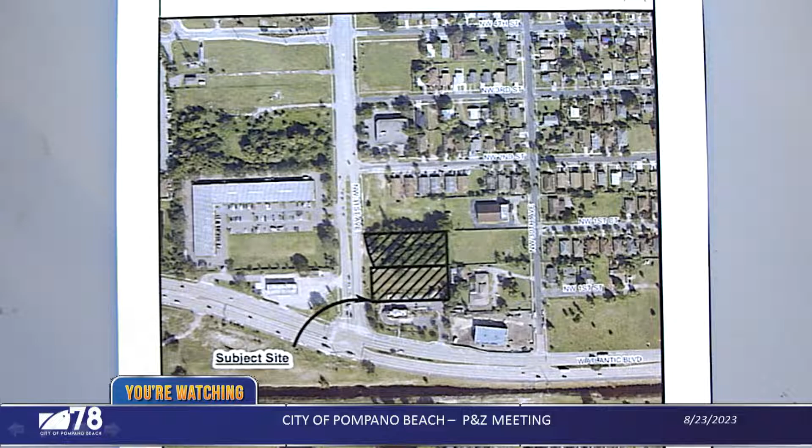All comments from the DRC meeting have been addressed. The plat reflects the All-County Development Review Report recommendations, and the review standards for a plat found in Article 5, Part 7 of the Code have been met. Therefore, staff recommends approval of this plat with two conditions that must be completed prior to placement on the City Commission agenda: first, the plat cover page must be signed and sealed by the surveyor and all owners; second, the applicant must submit a title opinion less than 6 months old addressed to the city. That concludes my comments for this evening.

The applicant is here to answer any questions if you have any. Does anybody have any questions of staff? Applicant, would you like to come up? Only because you're going to have to go on the record to say that your client will accept the two conditions, if you don't mind.

Yes, good evening, board members. My name is Elizabeth Surukdisian. Maggie had a hard time saying that last name. I'm here on behalf of Pulice Land Surveyors, representing the owner. For the record, I'm here only if there were questions for me. But Maggie did a wonderful presentation.

You're fine with the two conditions? Yeah, of staff? Yeah, that's standard. Mr. Chair, can we just get her address too for the record? Oh, okay, yes, I'm sorry.

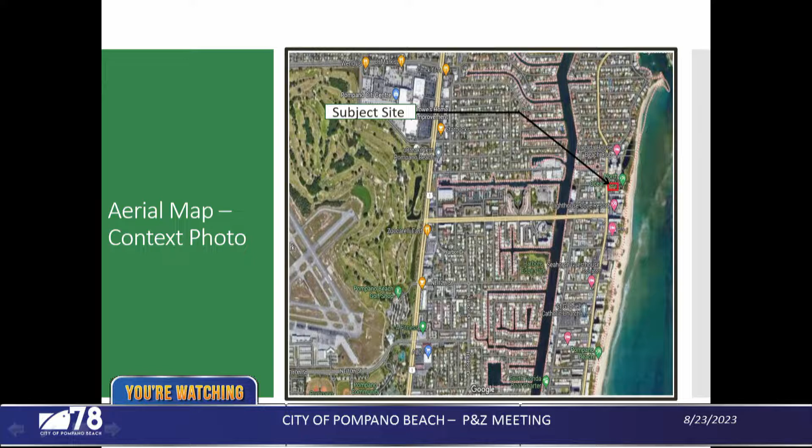This aerial photo shows the proposed building site in context with the area and the air park. For the purpose of this application, the height of the building is 242 feet above mean sea level, or 234 feet above ground level.

Excuse me, Diego, just make sure into the microphone for the record. Sorry. That's okay, thank you. Should I repeat it? No, you're good.

Go ahead. A review by the FAA has determined that the structure will not be a hazard to air navigation, and they included 3 conditions in the report.

Those conditions are included in the staff report. The application was reviewed by the city's air park consultant, Kimley Horn.

Our Kimley Horn representative, Mr. Tom O'Donnell, is here this evening if any technical question may arise. The application was also reviewed by the FDOT.

The application was reviewed against the air park structure permit review standards of the zoning code, and details of how the project complies with those standards are included in the staff report in the backup material.

The Development Services Department recommends approval of the air park obstruction subject to the following comments and conditions. First, construction must commence prior to the expiration date of August 16, 2024 of the FAA determination, or any subsequent extension that may be granted.

Second, if construction cranes are anticipated that exceed the maximum allowable height stated in the FAA determination letter, this temporary structure shall be submitted to the Federal Aviation Administration and a determination of no hazard received.

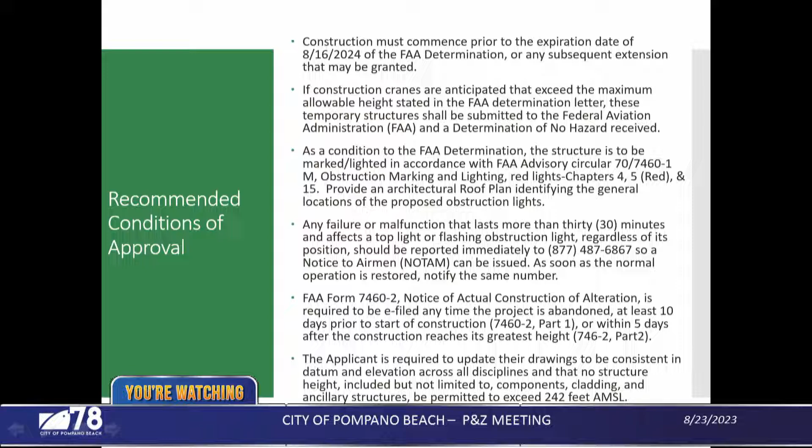AMSL, which is above mean sea level.

Okay, that's it, right? That's your report? Yes. Okay, anybody have any questions of staff and/or the consultant? Seeing none, is there an applicant?

Good evening, Mr. Chair, members of the Planning and Zoning Board. My name is Mike Vondermeulen. I'm with Keith. Our address is 301 East Atlantic Boulevard, and I have been sworn.

In reference to the conditions of staff, those are also the conditions of the FAA. We will comply with those. So there's no objection to any conditions. Here to answer any questions you may have.

Okay, anybody have any questions of the applicant? No, but, Mr. Chairman, is there a question going on with staff about some of the conditions here?

Okay, good evening. For the record, Tom O'Donnell with Kimley Horn & Associates. My place of business is 8201 Peters Road, Plantation, Florida, Suite 2200.

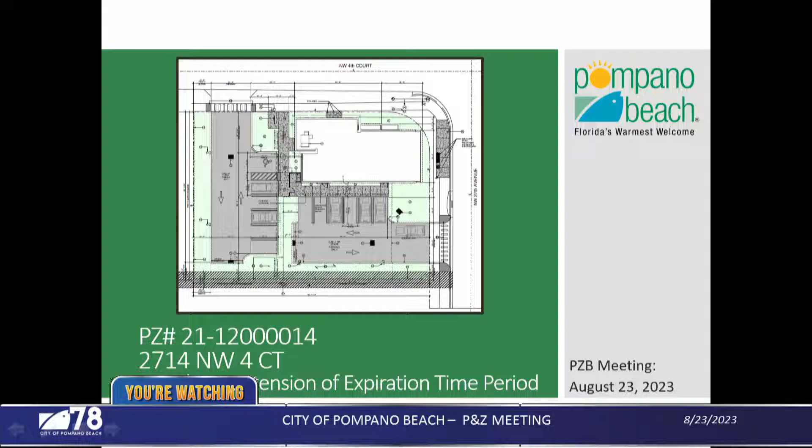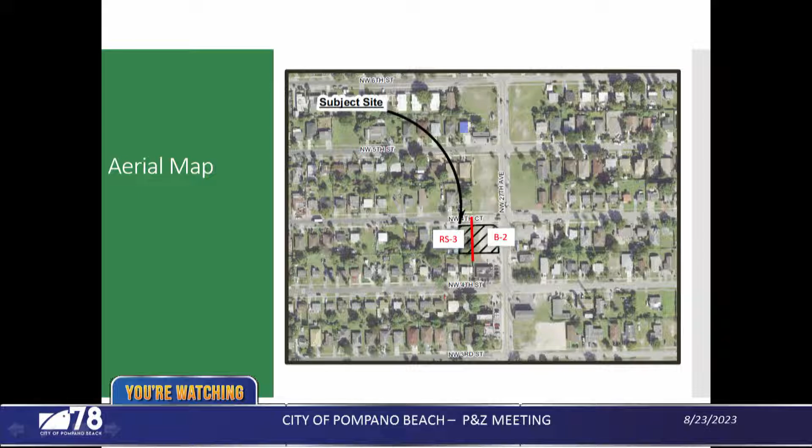My name is Lauren Gratzer with Development Services. This item is for the extension of the time period before which the development order expires for the site plan at the corner of Northwest 4th Court and Northwest 27th Avenue. The project is for the construction of a new BSO substation within the Northwest neighborhood, located north of Atlantic Boulevard, just between 31st Avenue and Powerline, within the Northwest 27th Avenue corridor. The property has a split zoning of B2, community business, and RS3, single-family residential.

So just a quick overview of the project, as this has not previously come before the board. It is a minor site plan and therefore was reviewed by the DRC and approved by the Development Services Director. Given the limited scope of work, the project did not require to come before this board. However, the authority to grant the extension of the development orders does fall on the Planning and Zoning Board.

The building that is proposed is going to be about 2,800 square feet and will be used for the police substation. The project was reviewed by the DRC in May and July of 2021. It was approved September 7th in 2021, and therefore expires September 7th of 2023.

This project also obtained zoning board approval for a special exception because of the RS3 zoning district designation for the use of the police substation. The zoning board of appeals approved the special exception in 2020, and that has since expired, so they will have to get a new special exception approval.

The applicant is requesting this extension because they were unable to obtain an approved building permit in a timely manner due to various delays with the design and bidding phases of the project. The applicant has made reasonable efforts submitting the work on the permit, and therefore they may be considered under one of the criteria for the extension of the site plan for the development order. Under the code section that allows this extension, making a reasonable effort towards the building permit application does fall under one of the criteria, which is letter A.

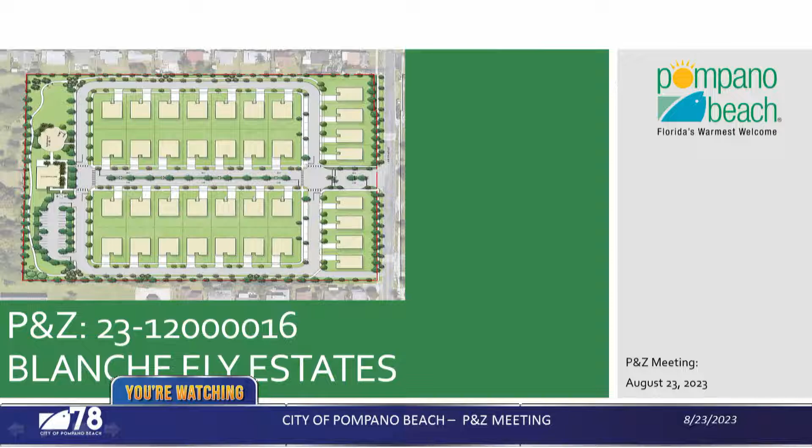This property is located at the 1600 block of Northwest 6th Avenue, located on the west side of Northwest 6th Avenue and north of Northwest 15th Street. Here is an aerial of the location of the property. It's located in the Blanche Ely plat on parcel A to the west, just abutting Sanders Park Elementary and on the west of Northwest 6th Avenue.

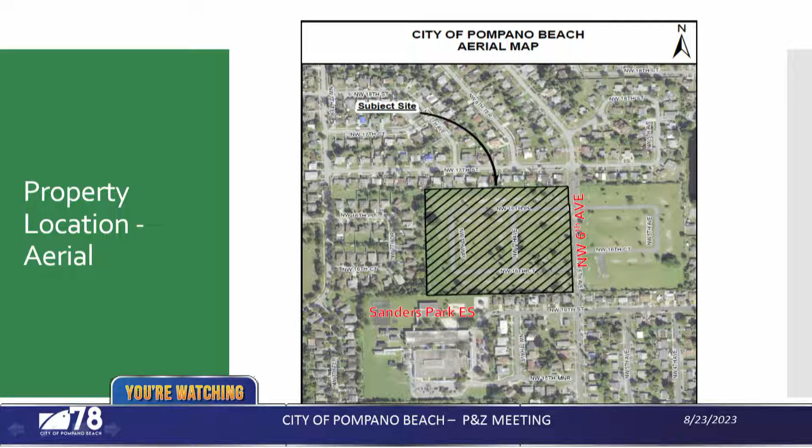The property is currently zoned RD1, two-family residence, with a future land use designation of low. The site is currently vacant. The applicant is proposing 36 single-family dwelling units on an 11.46 acre vacant parcel in the Liberty Park neighborhood. The total lot coverage is 35% per lot. The site plan was reviewed by DRC on July 5th, 2023 and August 16th, 2023. The AAC application is pending submission at this time.

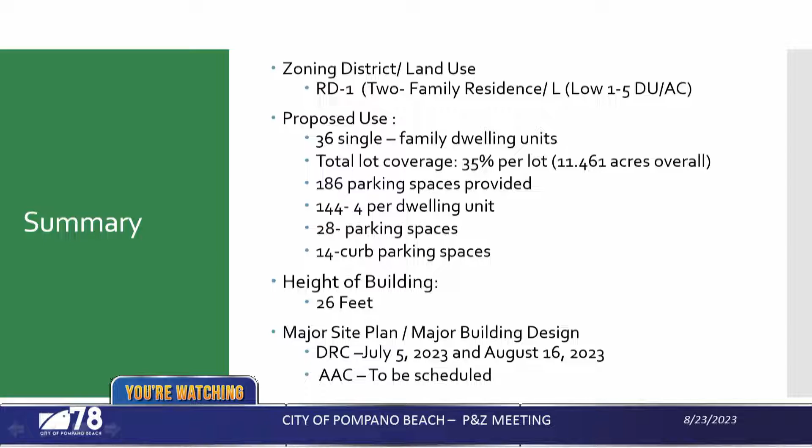The site will provide 186 parking spaces: 4 parking spaces per dwelling unit, 28 parking spaces for the clubhouse, and 14 curb parking spaces, which you will see on the upcoming site plan. Here is the existing conditions of the property.

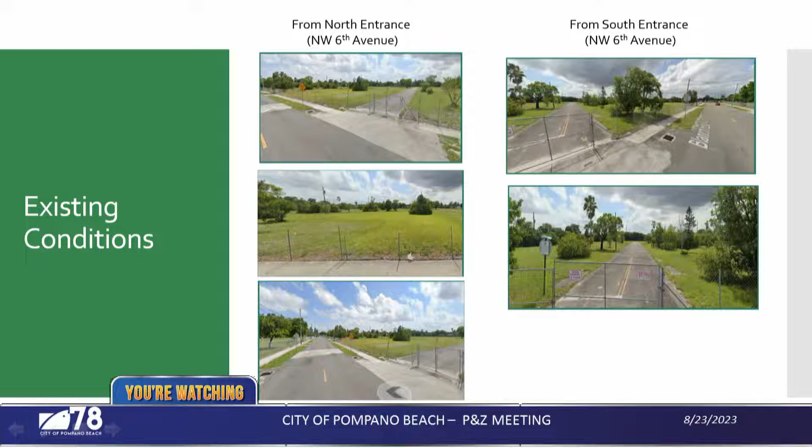You can see that it's vacant on both sides. To the north is RS4, residential single-family residence 4. To the south is RS4. To the west is RS4, and to the east is RS3, and it's consistent with the existing neighborhood. Here is a site plan of the proposed development.

Staff has 2 conditions. The second condition, as referenced on this PowerPoint, was not mentioned in the staff report. The following conditions are: on all elevation sheets, call out all architectural features to demonstrate compliance with variability and required number of design features for each model.

Repetitive look-alike multi-building development shall be prohibited. Multi-building development subject to these standards shall ensure that each structure is distinguished from the others through the use of 2 or more features found in 155.5601.c.4. The second condition is to provide HOA documents that clearly state that the trees on the property are protected, cannot be removed, and must be pruned and maintained in accordance with currently accepted ANSI A300 Part 1 industry standards and industry best management practices.

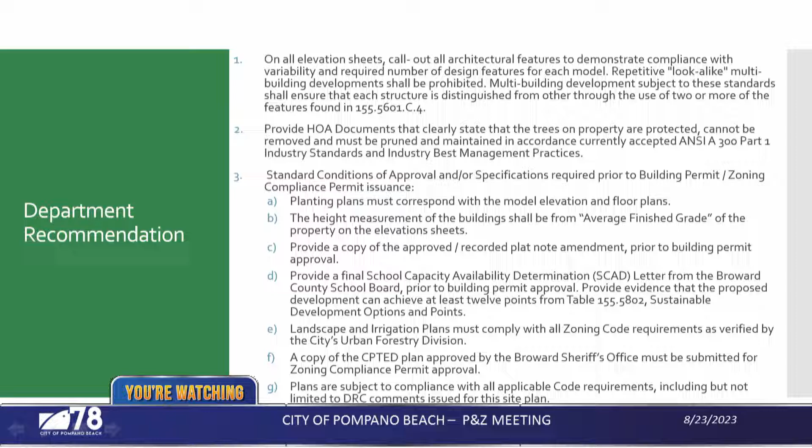This concludes my presentation. I'm available for further questions.

So just to understand, in our report the third condition was on it, but the second one was not. The first condition was there, but not the second condition, the one about providing the HOA documents. So in our staff report, there were actually 2 conditions, right? The second one, about the HOA, was not included in ours?

Let me clarify. If you look at your PowerPoint, you have 3 conditions, right? And condition 3 has a bunch of subparts to it, correct? Correct, yes. Does that one apply? Yes, it applies, I'm just not reading it into the record. So which one did you read into the record then? The second condition, no, the third - you read the second condition into the record. So this will be the third condition: provide HOA documents that clearly state...

The condition that has A through H, would you read that one? Because you didn't read that into the record. Okay, I can read it - those are standard conditions. You're not reading it because it's standard conditions, is that what you're saying? Yes, I'm sorry, I misunderstood. Not a problem. It applies, same as you're saying, it just wasn't called out.

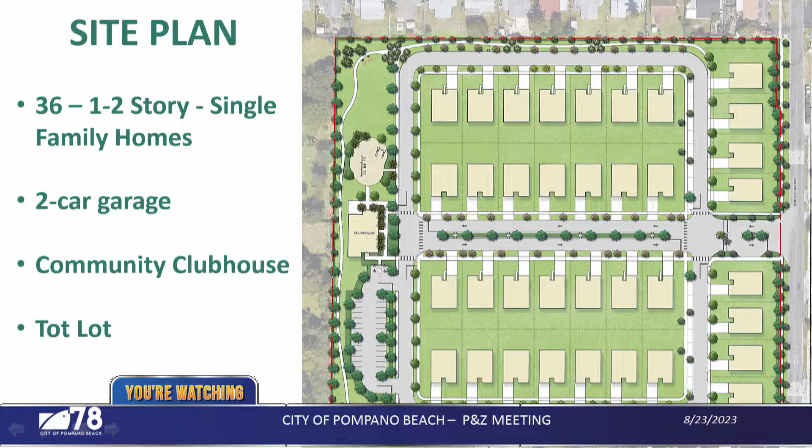All have two-car garages, all have a two-car driveway. There's plenty of parking at the clubhouse. We have a very large berm and landscape area along Blanche Ely Avenue. It's going to be a really, really nice project.

So I'll conclude there and just answer any questions you may have. Okay, and we have no problem with what is now 3 conditions of staff? Correct. Okay, thank you.

Anybody have any questions of the applicant? Yes, Mrs. Coleman, go ahead. I'm trying to figure out how this is going to work. Is there an HOA? There will be an HOA.

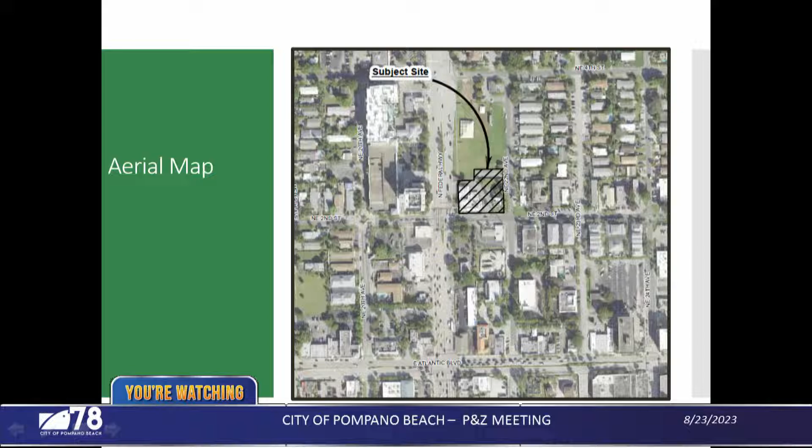This aerial photo or map shows the project site as we know it, where the old funeral home currently is. This photo isn't current—it doesn't show the Celeste project directly to the north that you approved just over a year ago, and it's currently well under construction. This is an old enough photograph that shows the vacant lot where those Christmas trees were sold for so many years.

The details of the project I will let the developer and his design team get into, but a brief summary is that the project proposes a 7-story mixed-use building with 95 units and ground floor commercial space facing Federal Highway, and the site is just under an acre. The project is utilizing 2 density bonus options available in the core sub-area of the ETOC.

First, the public art density bonus, plus the density bonus option where 100% of the required parking is within a parking structure. The total of those two bonus options would allow an additional 34 units, of which the applicant is adding 19 to the 76 units allowed by right, for a total of 95 units. The project was reviewed by the Development Review Committee for various revisions throughout 2023 and received building design approval in June from the Architectural Appearance Committee.

This site plan shows the extent of the building footprint and the relationship of the ground floor building liner with the rest of the site and context, as the project has 3 street frontages, with Federal Highway as a primary street, Northeast 2nd Street and 22nd Avenue as secondary streets in the ETOC. The ETOC establishes the hierarchy of streets within that district.

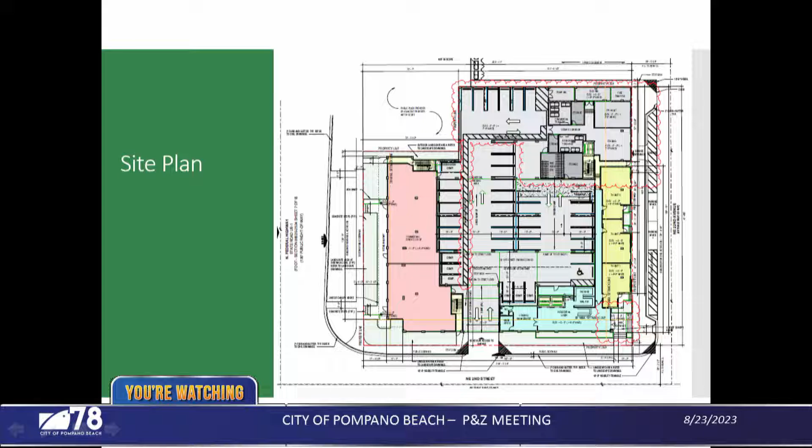Last, should the board find that the application has provided competent substantial evidence to satisfy the review standards for major site plan approval, the Development Services Department recommends including the following conditions.

First, density bonus option number 1 was selected in order to qualify for an additional 20 units per acre in the core sub-area of the project. Identify which strategy will be applied: a fee equal to 1% of the project's construction cost, or $250,000, whichever is less, or a piece of artwork valued at 1% of the project's construction cost, or a maximum of $250,000, whichever is less.

If a piece of artwork is proposed, clarify where the artwork will be located. The artwork must be accessible to the public and may be displayed in public open spaces or along areas abutting the building. The art must receive recommendation by the Public Art Committee and approval by the City Commission. The funds in lieu of art, or an appropriate bonding instrument, must be placed in escrow at the time of building permit and will be held until the art is approved after installation.

The second staff condition: comply with the affordable housing requirements as defined in code, either by setting aside a minimum of 15% of the proposed units as affordable housing or contributing the in-lieu fee for each unit prior to building permit approval. If providing the 15% affordable housing, the city will apply Broward County Policy 2.16.3 or 2.16.4, whichever is more appropriate, to generate the project's entitlements, thereby preserving units in the ETOC basket of rights. Third and last, standard conditions of approval and/or specifications required prior to building permit and zoning compliance permit issuance. That concludes my presentation. The developer and his design team are here.

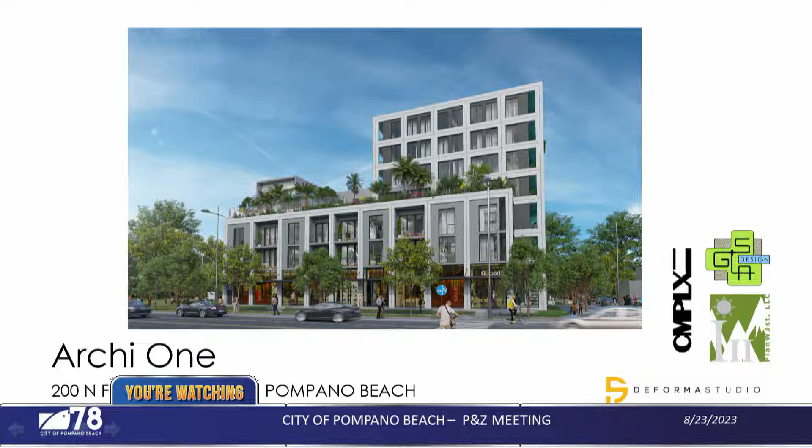As you can see, there are two buildings on the property. It's the home of the Crayers funeral home. Both of those buildings are going to be demolished to accommodate the new project.

As Pamela mentioned, we did reduce the project down, so we are providing 95 units with the project. We are also providing the proper lot width and lot depth as required by code, the proper impervious and pervious coverage, and as you know, in the overlay we have a different pervious and lot coverage requirement we're meeting. We are also providing the 80-foot maximum building height, and we're providing over the minimum required parking spaces for the project.

We are doing a tower building typology in accordance with that overlay. We're also located in the TO land use as well as the zoning. As she also mentioned, we're under an acre, and we're not requesting any variances, deviations, or adjustments for the project.

We've worked very hard with staff. As you saw, we've had multiple DRC meetings to make sure that the design is properly code compliant. And as she also mentioned, we are requesting 2 density bonuses, one for the public art—I'll talk about that at the end—and the structured parking as well.

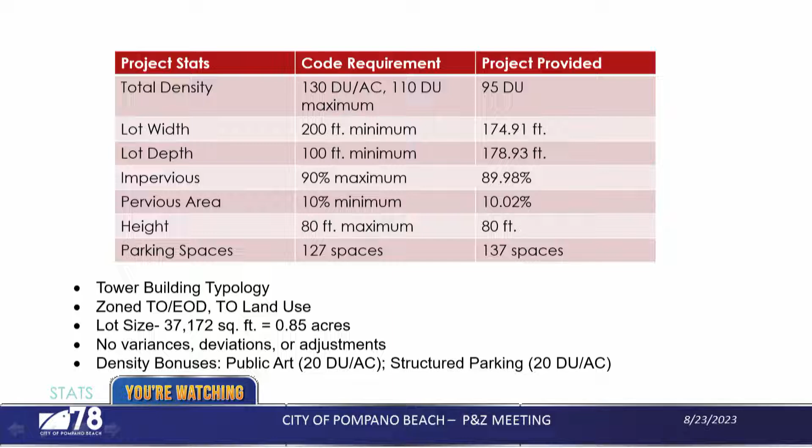Just some stats: the 95 units are broken down into 4 studio units, 55 one-bedrooms—that's the bigger demand—32 two-bedrooms, and 4 three-bedrooms, ranging from over 500 square feet to 1,500 or so square feet. We are providing over 5,000 square feet of ground floor retail.

We are fully structured with our parking. We have a co-working space that I'll show you in the floor plan on the 2nd floor. Our 4th floor amenity deck has the pool, the gym, the lanai terraces, and some covered outdoor space. The typical floor levels, the 5th through 7th, have tenant storage for the units.

As Pamela mentioned, we were approved by the DRC and unanimously approved by the AAC, which we're very happy about.

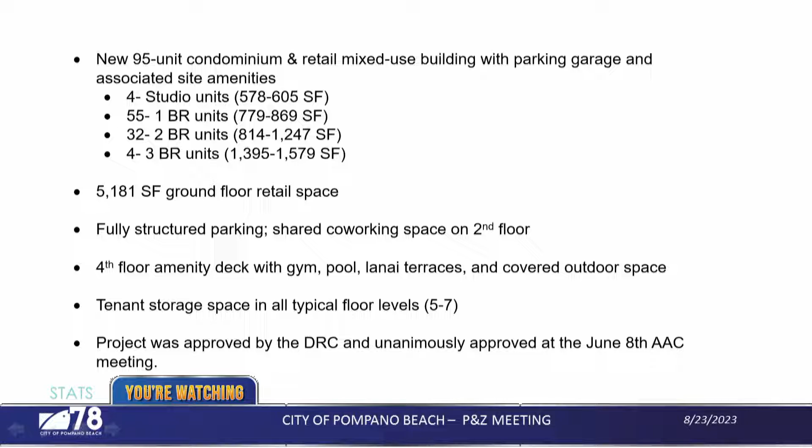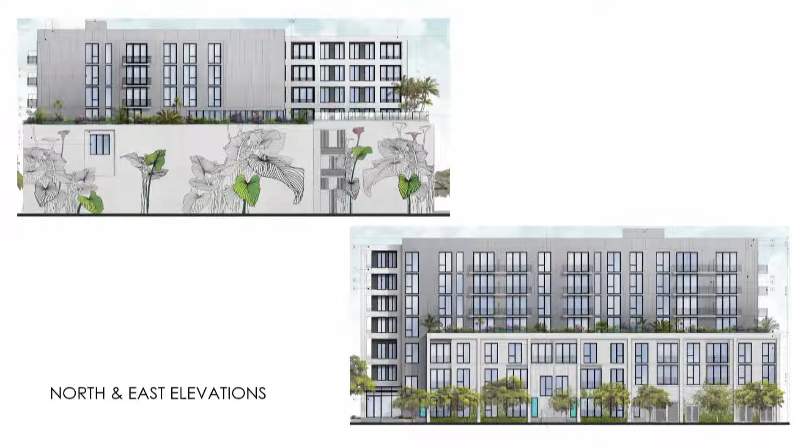And these are just our elevations. I will talk about that little flower mural in a minute when I address the conditions of staff. And here's the other elevations. The architecture team is going to get into more detail of the design.

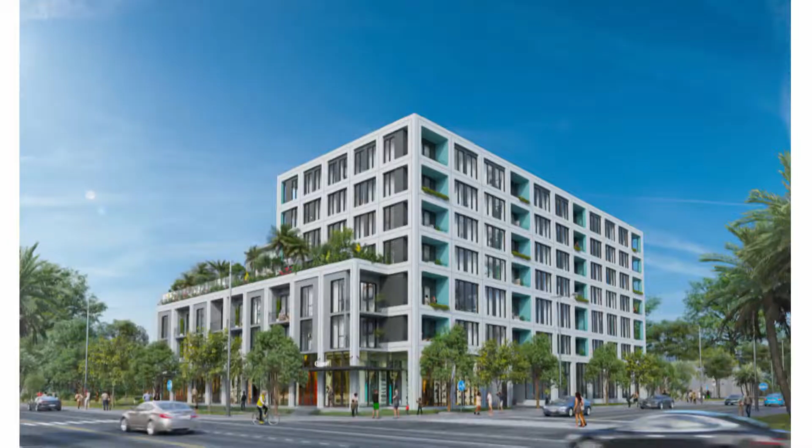Our landscape plan has 9 species of trees, 12 to 24 feet, 2 species of palms, and 14 species of shrubs and ground covers. We are very excited to say that we have gotten very good support from Wade, so we've worked with him pretty good as well. That's just an image from Federal Highway, looking at the project.

Regarding the staff conditions, for the first one, we will work with staff. We understand that the mural is not necessarily visible or accessible from the public as it's intended and as the city would like. We're going to work with staff to figure out where we can fit a piece of artwork. If that is not a possibility, we're going to pay into the fund.

For number 2, we're going to be doing the affordable housing in lieu fee. The project was not designed to incorporate the affordable housing units. And with the standard conditions of approval, we will make sure that we meet each one of them.

About the SCAD letter, we do have a preliminary SCAD determination from the school board, and we request the final as soon as we get our development order from this board. And with that, I will pass it over to the architecture team. Okay, thank you.

Good afternoon, board members. My name is Camilo Diaz with Deforma Studio at 5555 Biscayne Boulevard in Miami.

That's right, I haven't been sworn in yet. He has not? Okay, can you raise your right hand for me? Do you swear or affirm that the evidence you're about to give will be the truth, the whole truth, and nothing but the truth? I do. Thank you.

As Ms. West explained, this is a mixed-use project with retail, parking, and residential components. The building is 7 stories tall and has a total of 95 residential units.

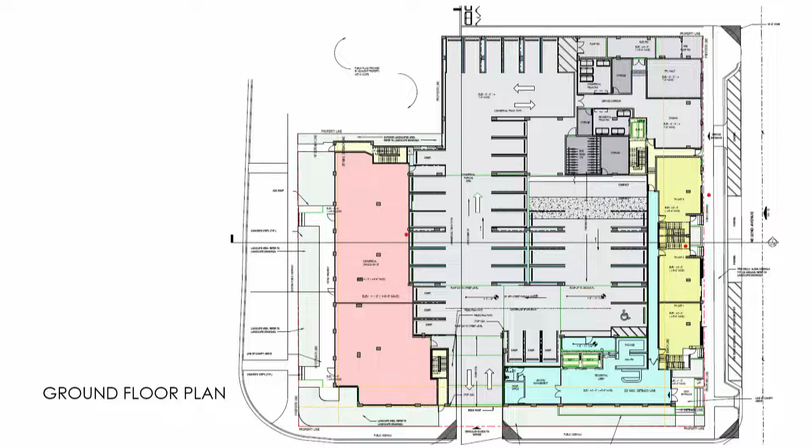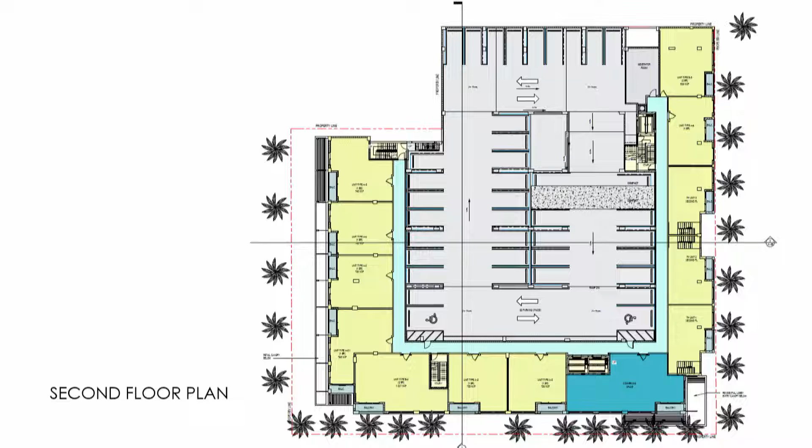On the 4th level is our amenities level. Here we have a gym. We have the pool deck facing west. We also have a set of planters and terraces, basically, that provide sort of a buffer toward Federal, that also provide a little bit of a contrast to the architecture of the building, which is very rectilinear, very straight angled. We want to have a very lush garden above it, kind of softening everything up a little bit.

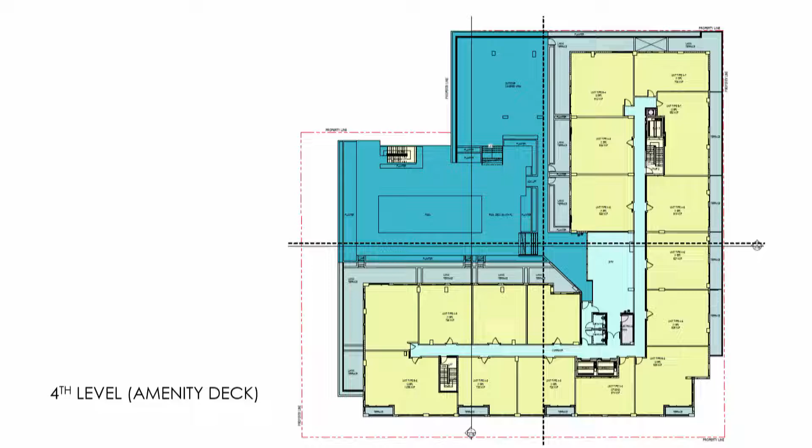And our typical level is our residential level. And as Ms. West mentioned, we have a set of tenant storage in the middle of the building for all these levels.

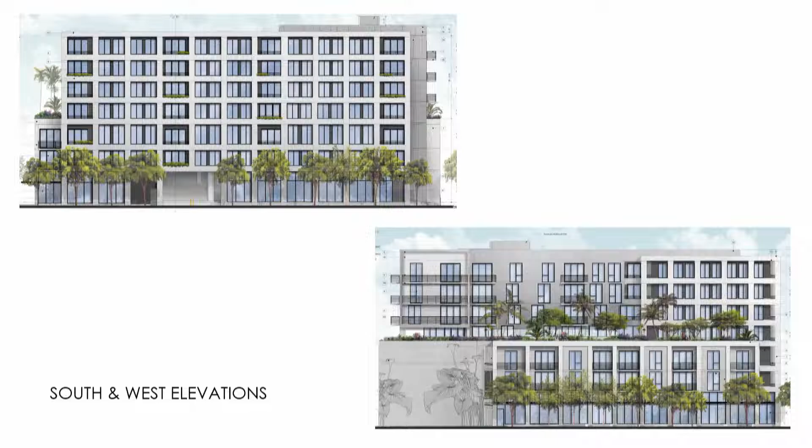So we tried to articulate the massing of the building in 3 separate components. The idea is, so that to minimize the size of the building, we kind of broke it into three different volumes that have their distinct identities. The podium is one. This part of the tower that you're seeing in the rendering on the screen is very orthogonal, very grid-like. And the other rendering is the one on our easel. The other component is a little bit taller than the other one, just to mask all our mechanical equipment on the roof, and the facade treatment is a little bit more fluid. There's a little more movement, so that it contrasts the orthogonal, grid-like one.

And basically, that's it. If you have any questions, I'm happy to answer.

Yeah, I don't know if Mrs. West said this, maybe she did. You have no problem with the 3 conditions of staff? We don't. Okay, all right. Anybody have any questions of the applicant?

Mr. Klasowitz, you look like you're ready to go. Are these units for sale, or are they for rent? For rent. Rental units? Yes, rental. Thank you. Anybody else?

Mrs. Coleman, go ahead. I'm trying to figure out, by the way, the building is beautiful. Thank you. But on one of the renderings, and then there's the elevations, it appeared with a western view that part of the mural was visible on the west side. Is it set back from the street? It is set back. That part of the building is set back. There's a park that's in front, and that's sort of what we've been trying to work with staff to figure out. The park is there, it has trees, and part of the fear is that the trees are going to be blocking a lot of the mural. So that's why we're trying to figure out the correct placement and size for the artwork, to make sure that it's fully publicly accessible. It's quite a beautiful mural, by the way.

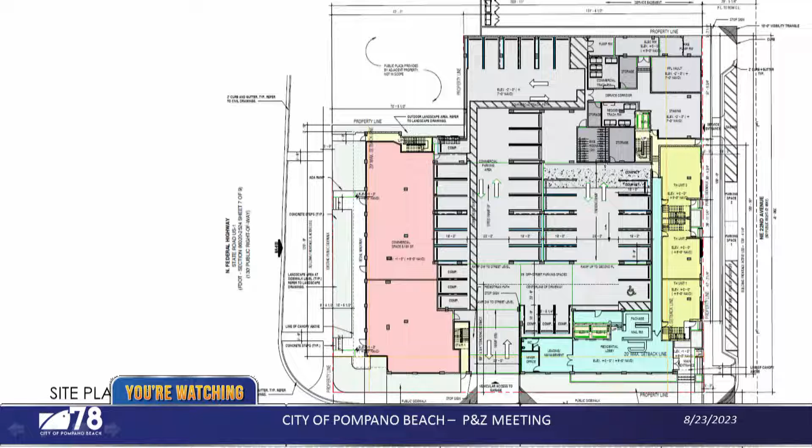Hi there. The Celeste project to the north has a colonnade that comes out above the ground plane, and the building above it, up until the amenity level, will stick out. I'd have to check, but this building is set back from that. Well, there's another dimension on there which I can't read because I have old eyes. Yeah, I couldn't read it either. The gray on this plan that's in between the two sidewalks has a dimension.

So this colonnade is set back in addition to whatever the sidewalk is. There's a dimension that looks like it's about 10'5". So those columns are going to be back 10'5"? Which I do not believe is the case. Right, I don't think it is either.

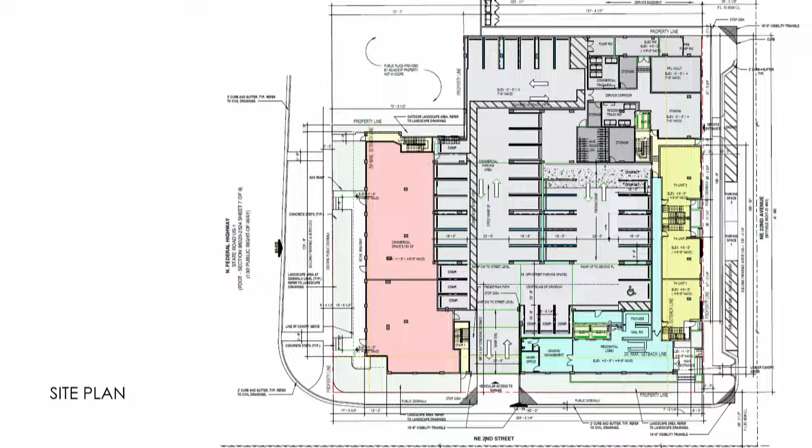I go to that bank once a week, so I drive in there, and I look up and say, yeah, this reminds me of construction. They're going to drop something on me. I feel it. But I commend your style, it's beautiful. Thank you.

Anybody else have any questions before we move on? Is there anybody in the audience that wants to speak on this?

Okay, seeing none. I wanted to make one other comment as well, and this is obviously about your project tonight, but it's one of the things, and Mrs. West knows this because I bothered her a lot during the course of the ETOC. I spent a lot of time with her, probably more than she'll ever get back. But we talked a lot about this concept, and we have the other project up on 6th Street, where you have a completely enclosed garage. I think the sustainability of having projects in a downtown area where you don't see those garages long-term will make them a little more timeless than ones where we get a bit more exposure. So I realize you got a bonus for that, but we really wanted that element, and I think it's a very important thing for us long-term. So I do appreciate that, and it's one of the things we pushed very hard for when we did this overlay district.

Thank you. Anybody else have any questions? I think I opened it up. Did I close it? I closed it, didn't I? The public comment. Okay, with that, unless we've already got them to agree to the conditions, I did want to ask one other question.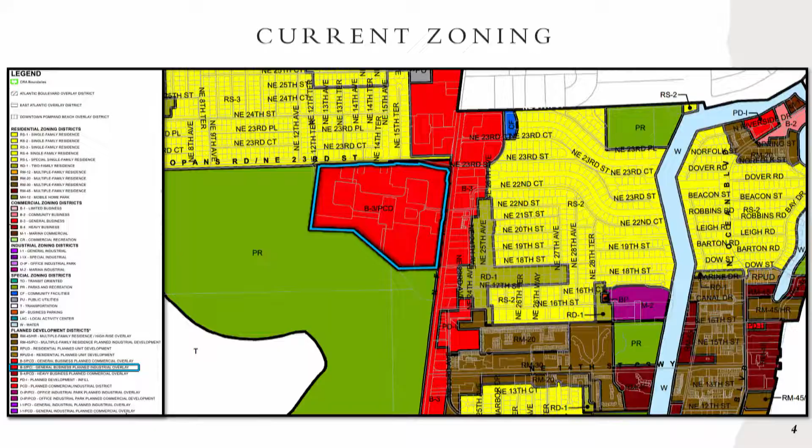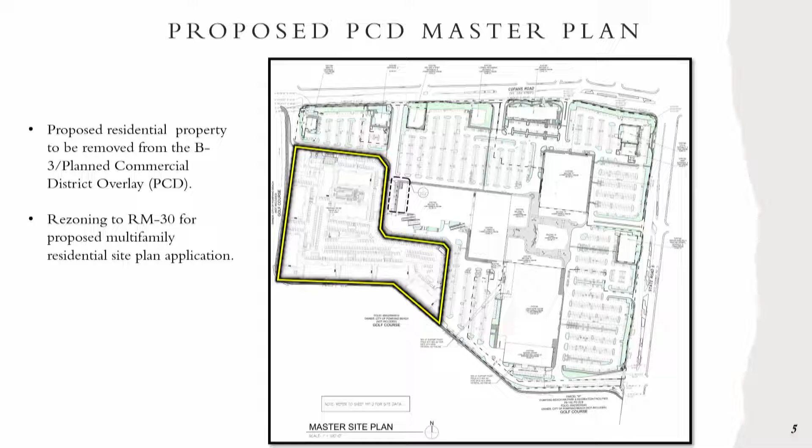So this is the portion that's going to residential. In this drawing you have Copans Road along the top, and along the side, I guess the engineers like to call Federal Highway State Road 5 — I didn't know it was State Road 5, I always thought it was US 1 — that's on the right-hand side. Outlined in yellow is the portion that's going residential. And then, on the proposed zoning map, you see that the B3/PCD would remain in effect for the 47 acres, and the RM30 would be proposed for the 12 acres.

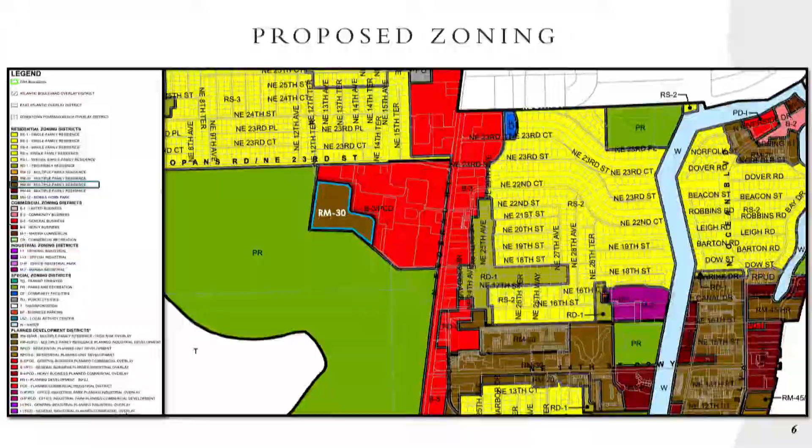And then this is our site plan. Along the left-hand side and the bottom would be the golf course, the city's golf course. Along the top and the right would be the balance of the shopping center for the Citi Centre PCD, and we'll get into that. So when we did the land use amendment, we committed up front that 15% of our units would be affordable, and we're keeping that in effect.

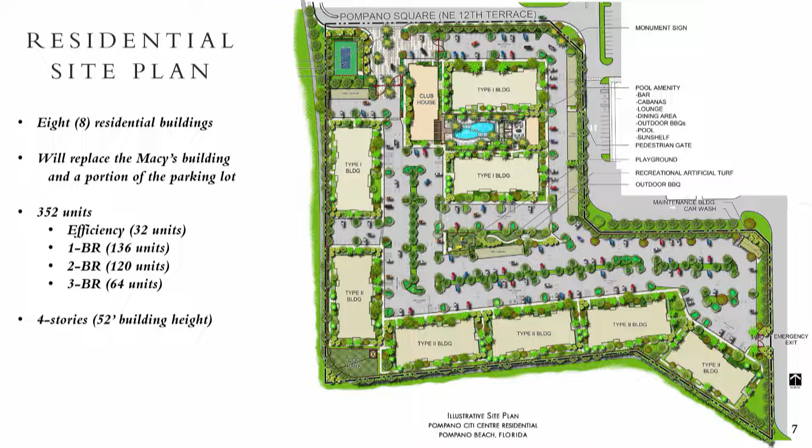One of the conditions for the site plan is that prior to getting a building permit, we need to demonstrate that we've done that. What that means is you not only agree that your rents for 15% of the units will be below a certain number, but you also agree to keep that in effect for 30 years. So you do a restrictive covenant saying that you always have to have 15% of these units affordable for the next 30 years, and of course we will do that. That is the standard procedure. You'll notice we're not buying out of it by paying a fee, we're building the affordable housing on the property.

So these are just some renderings of some of the buildings. I'm sorry I don't have an easel with boards, but we thought we'd do it this way. We've got different building types, so I'll show you each of them. If you have any questions at any point, please stop me.

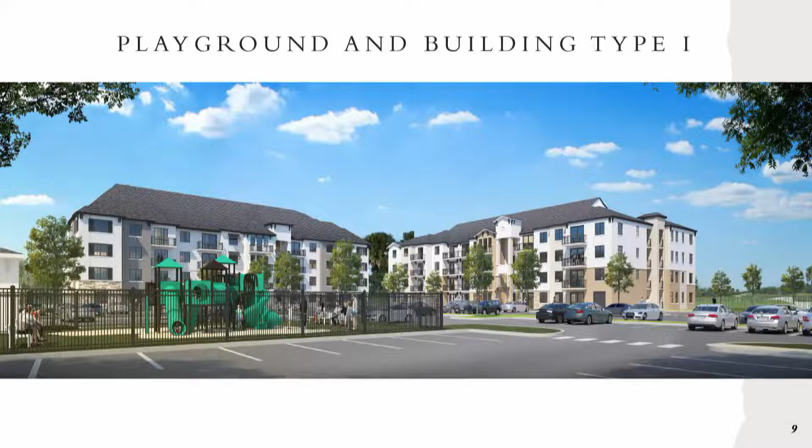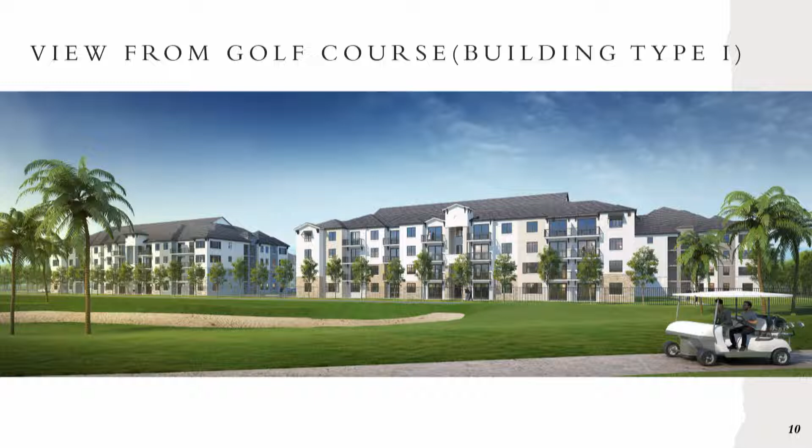One of the great things about this is it offers an opportunity for a lifestyle where you're living in an active place with shopping and everything, but then on the other side you have the golf course, which is green and open. So it gives you a little bit of both, a green area and an urban environment, all in the same place. That's one of the reasons we're so excited about it.

You've probably been reading that there's a lot of this going on, taking down portions of shopping centers and putting in residential. We did it recently at Coral Square Mall in Coral Springs. Not too long ago we had another shopping center in Sunrise that was very deep, and we tore down the buildings in the back, moved some of those tenants up to the front, and built residential behind it. We're doing that here. If you're following what's happening with old Sears stores all over the country, this is happening everywhere. As retail declines somewhat, this is a way to bring new life here, with people living here who could shop here. It's a trend we're seeing nationwide.

Just another one of our building types. And the site plan, when you look at number 7, is basically the same site plan that we showed when we did the land use amendment, with a few changes.

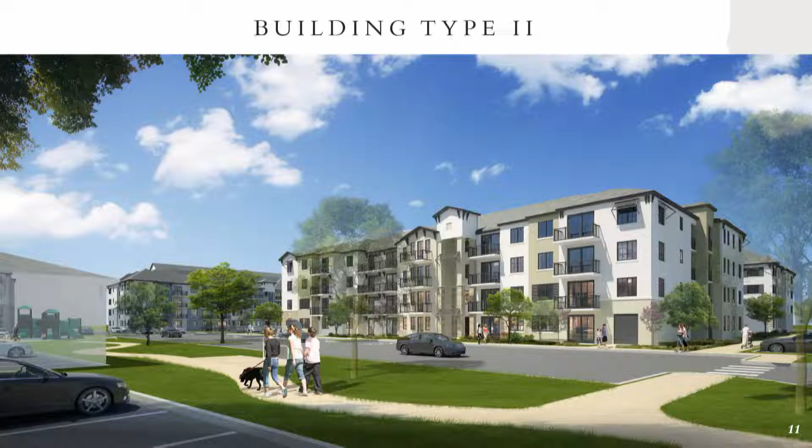Number one, we got comments early on from staff to make sure we beefed up the landscaping adjacent to the golf course, so that if someone isn't shooting the ball straight the way they're supposed to, it's not going to come into the property and hit a building or hit somebody. So we pulled things back a little bit and put a bunch of landscaping in along the golf course to account for, I guess, the lack of skill of some of the golfers that might be out there. I don't play golf, so I guess I can say that.

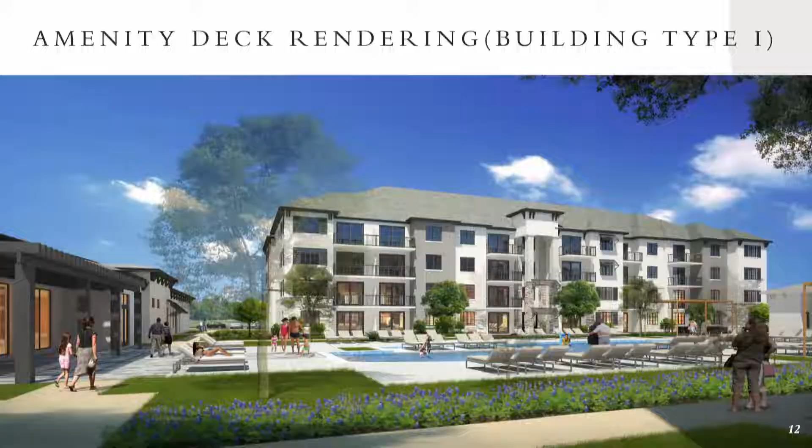One of the things we did here is that a lot of people like to come off of Copans, around the back side of the shopping center, and go out to Federal. That area you see now is not a public street, it's private, but we know that people use it. We were actually asked to make sure that we did not eliminate the shortcut, as people referred to it. So we did not eliminate the shortcut — you can still do it.

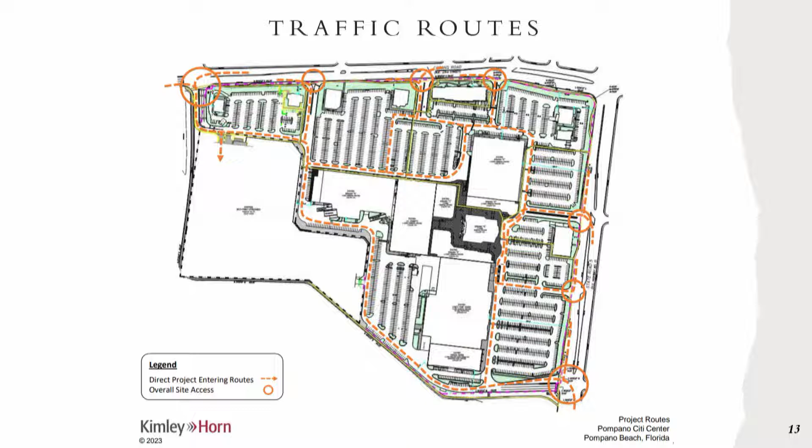Even though it's not really designed for that, you can still do it just like you could before.

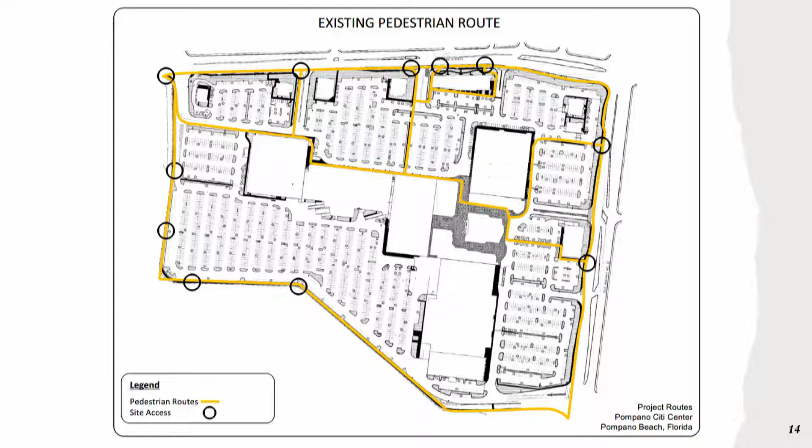Now pedestrian routes. If you're looking at how the shopping center looks today, we would be down in that lower left-hand corner, but these are all the routes for pedestrians. The perimeter of this site adjacent to the golf course has a beautiful walkway with trees, and I've seen people out there rollerblading, riding bikes, and walking. That's being preserved, not removed. It's being kept in place.

If you drop our residential into that little white space to the lower left, we're preserving all the access points out to that walkway that runs along the perimeter adjacent to the golf course, but we've also added another connection that will take you from this residential property into the shopping center.

Is there a way to point at something, like a little pointer? That'd be great. Would you show me how to do that? My technological skills are wanting. I want to point it there, right? Thank you, thank you very much.

So if you can see where the pointer is, we've added another crosswalk to take you into the shopping center, and I'll show you how that's going to work.

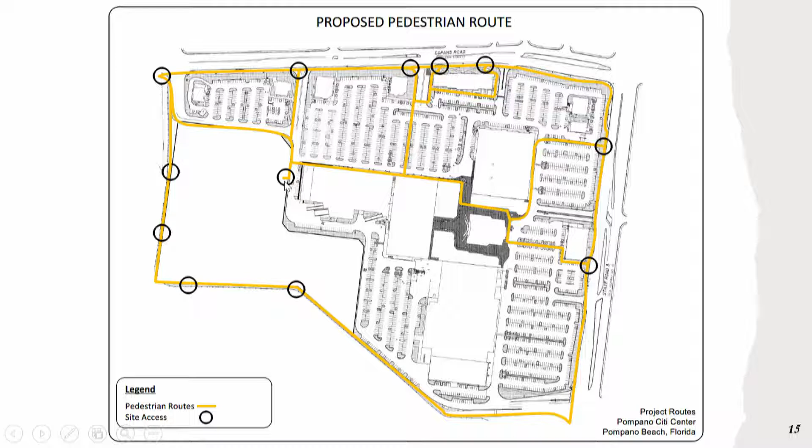If you see on this plan that little box of black dotted lines, when we tear down the Macy's store, we now need to put a new face on the building behind it. So there's going to be a new retail area added where this black dotted line is, and I'll show you a picture of it in a minute.

We put the walkway from our site to go out basically to that location, because the thought is they're going to be able to put in new retail and restaurant type uses there. We think restaurants would be perfect, and you could walk right to it from this development without getting in your car.

You can walk to other places on the property too. Since that area is going to be brand new, we focused on it as a good place to take our pedestrians when they're going into the shopping center. So the idea is that you can walk from one to the other.

We will have a secured perimeter, so if you live here, you'll have a fob or similar device—you can walk out, but when you want to come back through that gate, you'll need to use the fob to go back through. So it'll keep our residential secured, but also allow it to interface with the commercial property next to us.

The architects are trying to keep me on my toes, because you'll notice that on the plan on the lower right, north is pointing up, but for some reason on the plan on the left, they put north pointing down. I don't know why they did that.

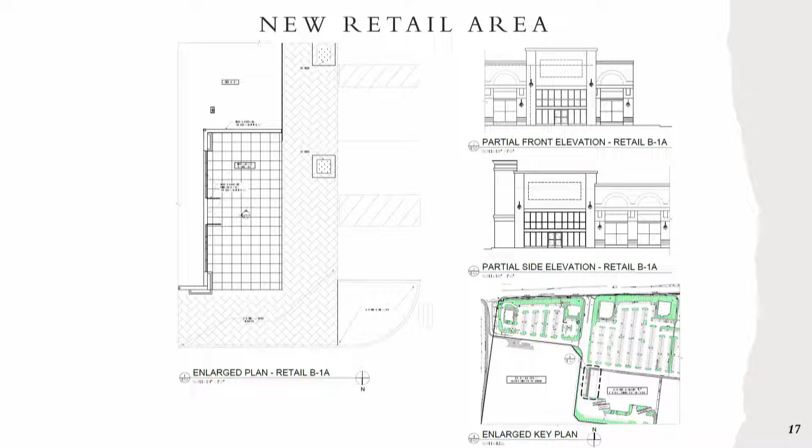At any rate, this is that new area, the new face on the building where I showed you the black dotted lines. It'll have a courtyard area out front, perfect for outdoor dining with tables and umbrellas. This is right across from that crosswalk I showed.

So we're adding landscape islands in that area so that when you're driving by, on the right-hand side you'll see our landscape buffer and all the lush landscaping we put in, while on the left-hand side you shouldn't just see a bunch of parking spaces. We've added landscape islands to make both sides of the drive aisle look nice.

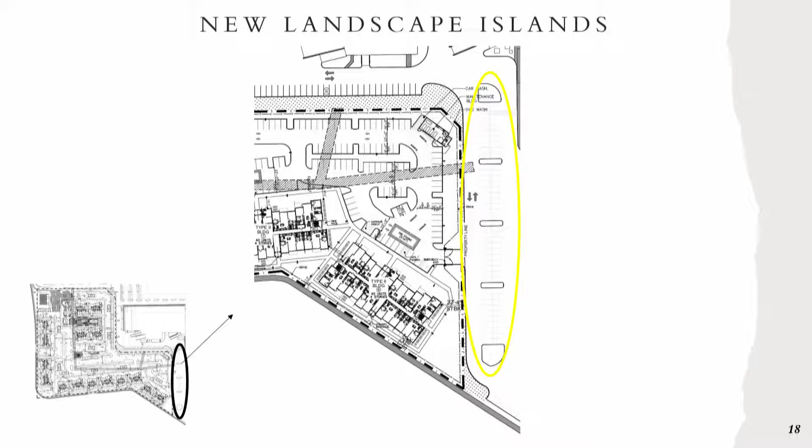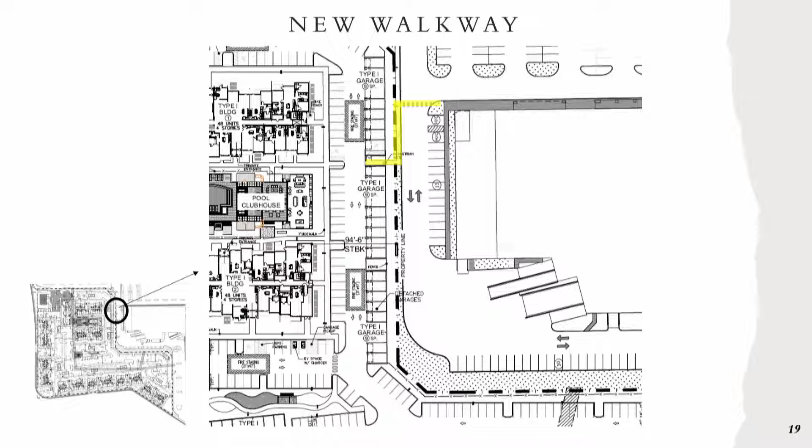There's a spot between the garages where we can run the sidewalk right through and take you to the crosswalk we're showing. We already had that, but it was originally envisioned for people walking on the outside of the residential. Now you can walk on the outside of the residential and get to that crosswalk, or you can come from inside the residential and get to that crosswalk.

And then we thought, when we do the crosswalk, we would do something special. We'll work with staff on the exact colors and everything, but you want people to see it, you want them to slow down. Of course there'll be stop signs and everything, but you want them to recognize people are walking through here. This is a treatment we've used in some of our other developments that we thought we would use here. I know I'm getting into maybe a little too much detail, but we wanted to show that.

The other thing we heard when we talked to people about this project is there's a parking field in the shopping center, near J. Mark's and the ABC Liquors, where people drive their cars diagonally through the parking lot because there's nothing to stop them. So what Sterling has been doing—Sterling is the shopping center owner we're purchasing from, actually we're purchasing from two entities, Sterling and Macy's—Sterling is adding wheel stops into those areas to stop people from cutting diagonally through the parking lot. We wanted to show you that.

I know most of the improvements we're showing tonight have to do with the residential, but there are a few improvements in the commercial. One of them is these wheel stops I talked about. The other is the new face on the building where we're tearing down the Macy's. And the third, if you're familiar with the Lowe's Home Improvement Store, it has an outdoor storage area on the south side of the store where, if you're on the perimeter, you can see all these bags and boxes. So they're going to enclose that outdoor area to make it more like a garden center, fenced in with a wall, so whatever's stored will be behind that and not in plain view like it is now.

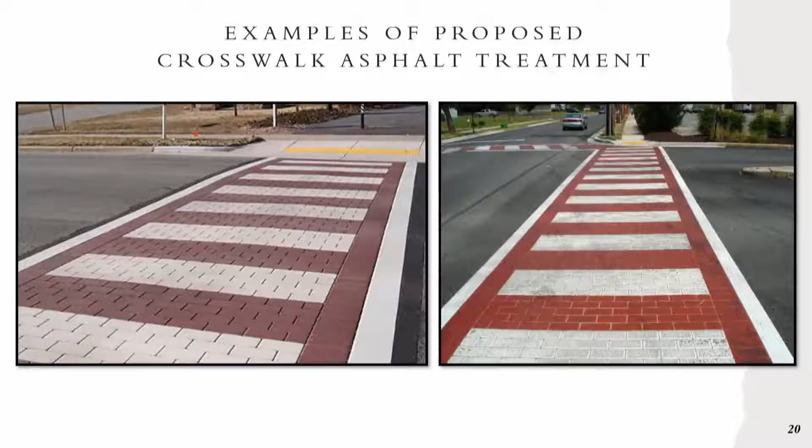But you do understand, Mr. Mealy, that there were never any cars in those spaces. There was never anything back there.

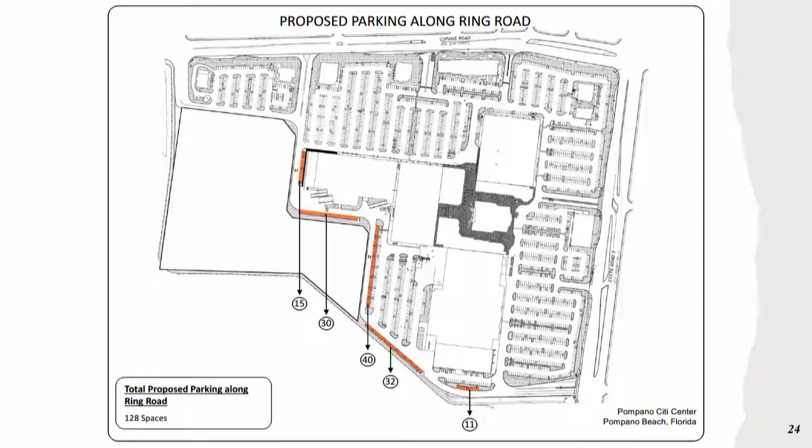Well, when I went out there, I did notice that the striping was faded, but it was faded in a lot of places. I also noticed that at least for those times that the police department or the sheriff's office is out there with their training exercises, it was pretty much blocking off that same area anyway. Now, I know they're not there all the time.

When they are there, it's pretty much the same route you'd be taking with what we're showing now. And is it going to be marked as a roadway, or is it just going to be asphalt? So today, unless you get right at US 1 or right at Copans where there's a little entry median, the rest of it is just 2 lanes of asphalt with a stripe. It's going to be somewhat similar here too.

Now, if there's signage we can do for wayfinding that can help people find their way better, we'd be happy to put it in, and happy to work with staff to make sure people know how to get from point A to point B. Because the new route will be a little different than the old route. But I think once everyone gets used to it, if you still want to avoid the light at Federal and Copans, you can still do that.

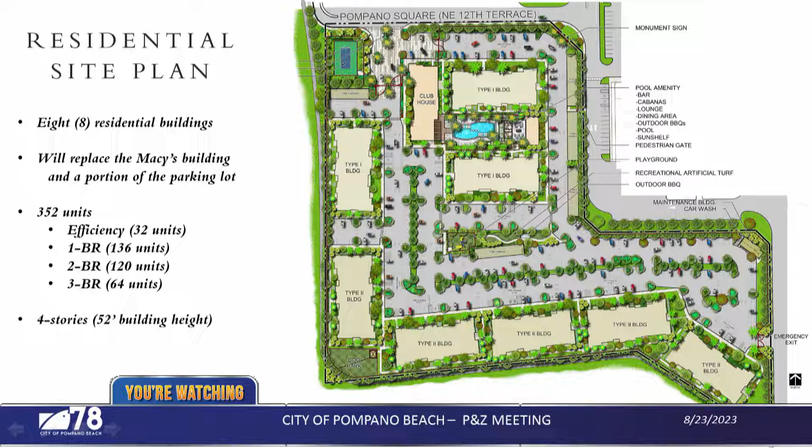We recognize you're going to have that issue, but Ms. Coleman, you know me from when I was city manager at Coconut Creek. We have a golf course in Wynmoor, and people would call saying the ball went through my screened-in porch. I'd say, you live on the golf course, you've got this beautiful view, and sometimes the ball coming in the screened-in porch is part of it. So we're putting everyone on notice, and of course we maintain everything. These are apartment buildings that we own, manage, and operate, so if there's damage, we're fixing it. The tenant doesn't have to fix it. Now, if the tenant's car gets hit with a golf ball...

Okay. Thank you. Thank you.

I just want to make a comment about Mrs. Coleman's comment. I lived on a golf course in Palm-Aire, and with impact glass, I think most of the damage will be to cars, so since they've moved the cars away... we got dings all the time from golf balls in Palm-Aire. Moving the cars away, I think, is going to eliminate a lot of the damage that could have been there. The way we've designed this parking lot, you'd almost have to hit the ball over the building to get into the parking lot. There's a spot on the left-hand side where there's some spaces, and that's what we heard too, that in our other developments on golf courses, the most complaints we get is when the ball hits somebody's car, they get a dent, and they come home and see it and they're not happy.

Okay, thank you very much. Thank you, I have a question.

Go ahead. So how far would you encroach on the area where Wendy's is? That's normally where I park when I walk around the blimp. So I'll park where Wendy's is. They have parking as well, right, on Wendy's side? Their own, yeah, they have their own, but how close are we going, because it's kind of like a driveway through there to the rear.

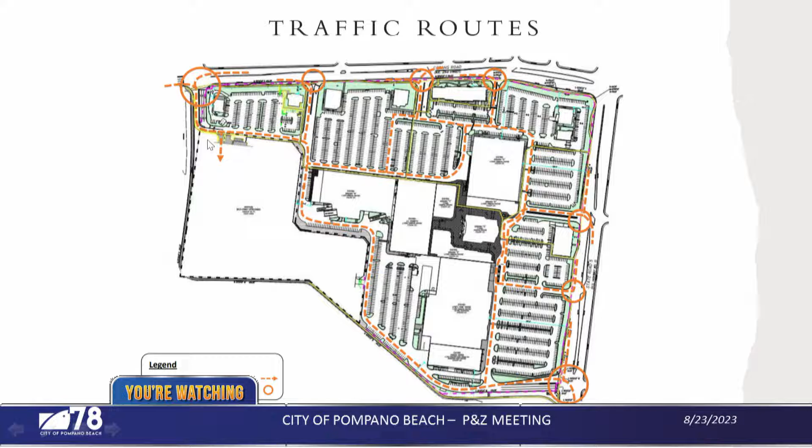That's true. Okay, I had a couple of questions, maybe also just things to think about. So the bike path that runs - we're looking at the perimeter of this diagram - is there going to be a fence from your new property that's going to separate the bike path from the property?

We'll have the fence on our side, and the bike path and all that will still be on the outside of our fence. Because as it exists right now, the bike path is very visible from that parking lot. My concern, as I'm looking at this, is putting up a fence that abuts directly to the bike path, just for safety concerns - this area will be separated and adjacent to a fence, so there will be line of sight issues and things like that.

So that's just something I wanted to raise, maybe something to think about. Maybe in early morning hours or later, for people jogging or walking or biking, having some sort of lighting there, different security issues might be something to think about. I believe we've pulled it back far enough, but we will make sure. Obviously, if somebody's riding a bike and they fall, we don't want them to fall into a fence.

I understand the question about the visibility as well. Not so much the bikes crashing into it, but also safety - when you look at it as it exists now, there's a feeling of openness and visibility from people being able to see and not being necessarily blocked by a fence, even for the residents that are going to be living in the apartment complex.

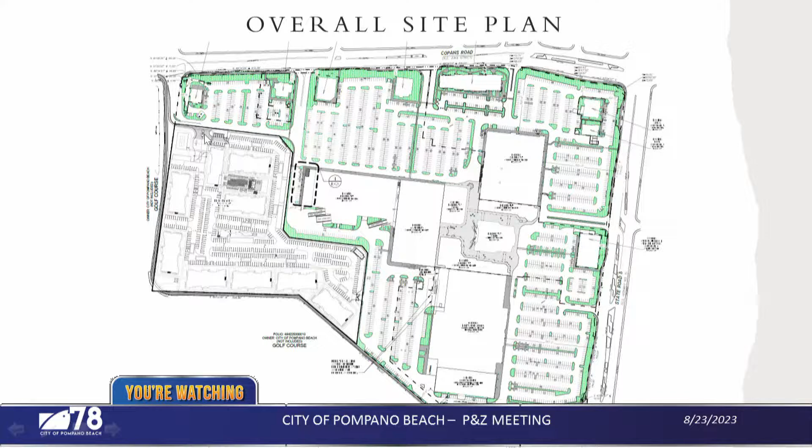Yes, I see it now, right. So that's the driveway going into and out of the residential, that little gray area. So if they wanted to go to the route that Ms. King was describing, they would come out here and then go this way. Or they could come out here and go this way. Or they could even go through the center if they wanted to go out on Federal or go to one of those other 2 Copans Road driveways. But I would think most often they would either go here if they were going westbound, and go here if they were going eastbound.

Well, not necessarily, they might come all the way down this new roadway we created, past Lowe's, and go south on Federal. Right, if they're going Federal south too. If they wanted to go Federal north, they'd probably go that way. I'm just thinking about, everybody's always complaining about traffic, and that's the major complaint I hear since I got on the board. Everybody tells me about traffic.

So I'm just thinking in the early morning rush hour traffic, it just doesn't seem like a lot of space to be able to wait. I've never seen an influx of cars over there like that. Remember, it's vacant, so I'm just thinking in the mornings during traffic hour, like how is that going to look? It's easy to look on here and go, yeah, they can go that way and that way. But there's a light by J. Mark's.

There's a light by J. Mark's. By Wingstop, there's no light. No light by Wingstop, but J Mart, yes. There's a light by J. Mark's, there's a light at 18th, and then there's one down further east on 18th. And then there's also a light when they come out onto Copans. That is multiple ways to keep from backing up.

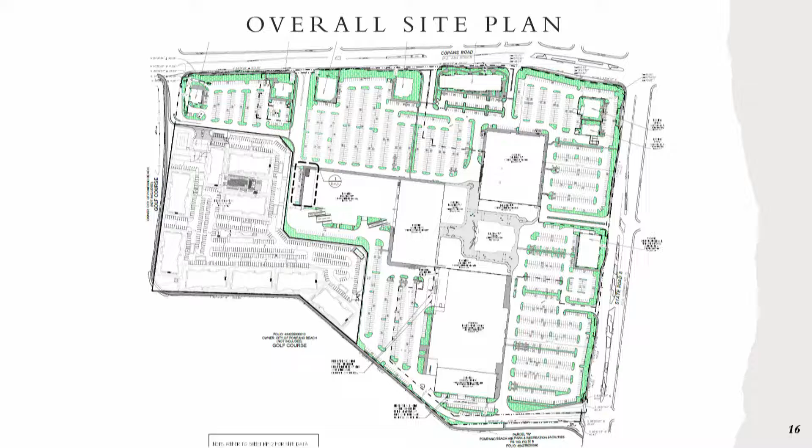That's a whole lot more options than most of the developments we look at. I think it's going to be much more active on top of businesses, so in the morning, probably most of those businesses don't get a lot of breakfast traffic. I don't know, isn't there an IHOP there? The IHOP gets a lot, Wendy's gets a lot, and Lowe's gets a lot of early morning traffic since it opens at 6 or 7. So it's an active center, but there's multiple things going on.

Which is why I'm asking the question, because it's an active center. I just hope we've done a good job of being neighborly to let the residents there know about your project soon. It seems compacted to me for a lot of cars inside that space to be able to get out, and then when you get out, you're right on top of all these other businesses that want business as well.

So I think we have a couple things going for us. First, there's a lot of driveways going in and out of this property on Federal and on Copans. Secondly, as mentioned earlier by one of the board members, our people are going to be going out in the morning. So folks coming for breakfast are coming in and out, but a lot of the other stores early in the morning don't have very much activity. Restaurants that serve breakfast would, Lowe's would, but a lot of others probably wouldn't have much early morning activity. And coming back in the afternoon during rush hour, you're going to have cars going both ways, in and out.

But again, we worked closely with your engineering people, your traffic people, and we had to get the signatures of all the other owners in the plaza, so at least they felt comfortable enough to sign off on it.